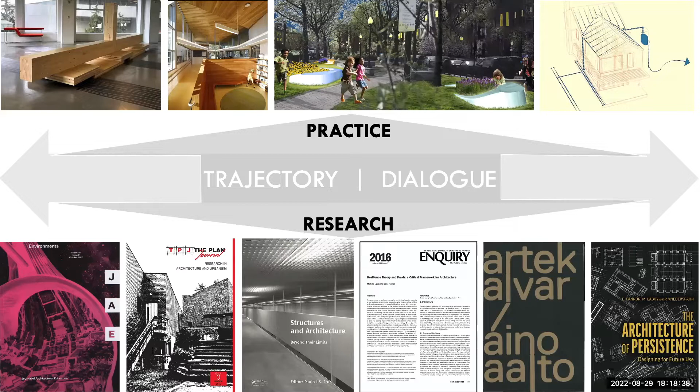So these motivations are what I call creative anxieties, which I have managed through a constant dialogue between practice and research. I have been very fortunate to have practiced for 17 years now, and that includes a substantial amount of built work, both new and renovated, as well as exhibitions, prototypes, landscape installations, and environmental strategies. So I'm a researcher who really is embedded in practice. I also have been teaching and researching for 10 years in a more official job where I conduct research. And I have been testing ideas and scholarship through articles, exhibit catalogs, books, all of which examine, reflect on, and challenge the way we think about practice.

And this dialogue between research and practice really started with my graduate thesis. At the University of Michigan, I combined a traditional historical research-based thesis for the urban planning degree that I was completing with a design-based thesis for my architecture degree. And that thesis was primarily focused on the concept of ecological fragmentation as a lens to analyze the landscape of Detroit. It really reflected my preoccupation with the condition that human development was creating in the landscape and its impacts on humans and other living species. And mind you, this was 21 years ago, and we still had time to fix the climate change issue. So we were still worried about how we're gonna fix this damage that we created.

I found that design, especially civil and landscape architecture, offered some infrastructural solutions to mitigate the effects of fragmentation. Ecological corridors come to mind. But in the human environment, we were a little bit less kind. Infrastructure dominates rather than just separating or healing. It operates at a scale that homogenizes people based on economic and political models that marginalize some by assuming that everyone has the same opportunity for mobility. And what results is not only ecological degradation from too much impervious surface and not enough green space, but also a misalignment between parts of the population and the richness of resources that we can have in metropolitan areas, in natural environments, etc. So basically a deep inequality. And that really had been an interest of mine since then.

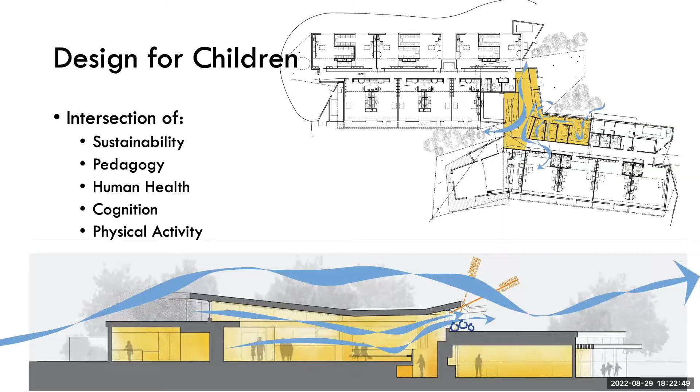This project at Princeton University was my last one at MTA. It was completed in 2017. And it became my own professional thesis, if I can call it that. It was a higher education client that had never built this type of typology before. It was intended to be for children of faculty and students there.

So it involved collaborating with many researchers in early child development, with educators, with parents, with user groups, and working very closely with Michael Van Valkenburgh landscape architects to integrate the building and the landscape into a continuous sequence of natural play, but also to advance the goals of the campus plan. Princeton had ongoing efforts to do ecological woodland restoration through each architectural project, and to build capacity of the campus in their green infrastructure for stormwater. So each project contributed to that.

The building and the landscape were not only beautifully connected as a spatial sequence for people, for water, for animals, but also they were an integrated whole. And it transformed a degraded greenfield site into a rich ecosystem for people and other species. But I couldn't help but wonder after those 11 years, how the lessons that were applied in these projects that were so well endowed could translate to environments and populations that have less resources.

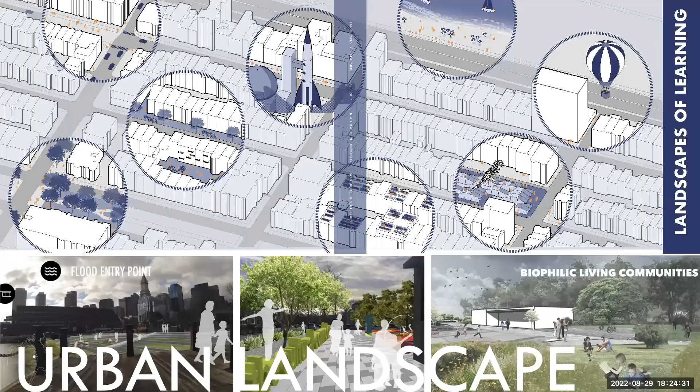And I went searching again for ways to interrogate how to mobilize that knowledge that exists within our profession of very thoughtful and talented professionals, and leverage that to solve bigger societal problems. And this is where getting into teaching as a research faculty gave me a new space to ask these questions. I became interested in how the paradigm of designing spaces for children so that they learn through exploration would be possible in urban environments, especially when so much of it was formed on natural play.

And when we think about the global situation, most populations are migrating to very urban areas that have less green space and more inequality. So after the Princeton project, I ran a 2-semester master research studio focused on this idea that in the city, the child explores the entire landscape, and therefore we should design every space in the city for learning and think about it as a constructed landscape.

The framework that emerged with our students really was an interesting exploration developed with a transdisciplinary team of experts, from neuroscientists to child's rights experts and pedagogy experts, to develop a set of principles to design cities that are more playful, safer, more green, more inclusive, and healthier.

The projects range from coastal protection that integrated active spaces for families, streets transformed into green cultural corridors that express the diversity of Boston children, to biophilic living communities that constructed new housing immersed in constructed landscapes. So this is really what propels my research, to work in transdisciplinary ways to generate knowledge about working with natural ecosystems and with real communities.

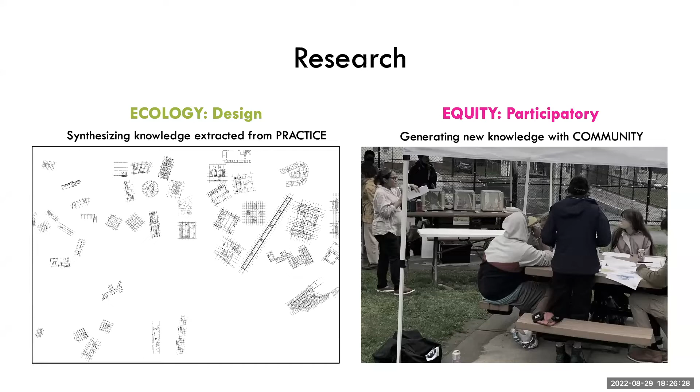I do systemic analysis of design practice through case studies, interviews, analytical drawings, mappings, and design projects. And I engage with communities most vulnerable to climate change through participatory research to co-develop new visions of how design can better serve them. And I'm working on the premise that our past and current approaches to building are completely inadequate. So we need a new paradigm.

In essence, we need a theory for building that is grounded in the real world and that guides us to build new urban ecologies that are more sustainable and more equitable, and to generate a robust discourse within our profession about where to build, what to build with, and who to build for.

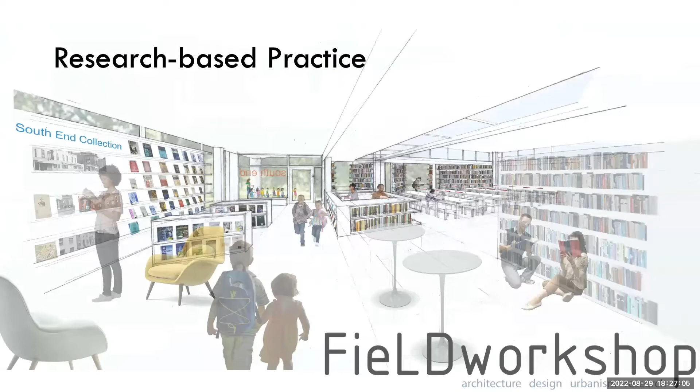This has also given me the benefit or the privilege of starting my own practice with my partner and husband, where we've been exploring some of the applications of this research to projects that have, let's say, lower budgets. We work with clients that have an interest in exploring interesting ideas and trying to do it in ways that are more efficient with resources.

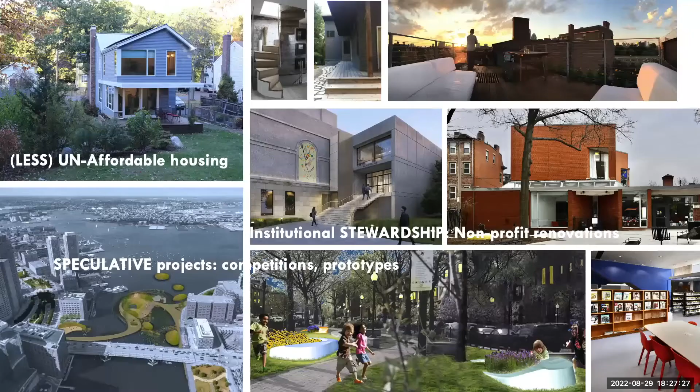So that includes what we call less unaffordable housing in Boston. I think affordable housing is really not a thing, unfortunately. We've done urban retrofits, and what has become a favorite of mine, transforming suburban typologies to be more sustainable and connected to the landscape, as well as what I call institutional stewardship.

So that's where we work with institutions like museums or nonprofit groups to do the hard work of master planning and executing the slow renovation of older but significant buildings, one little project at a time. And then speculative projects where we do competitions, prototypes, installations that explore some new idea about better connecting with the urban landscape.

So with that intro, I will dive into the meat of the lecture, which is divided into two related parts. In each of them, I will introduce to you what I see as a global dynamic that is changing in response to climate change. And then I will show you some of the design research and methods we're using to examine how architecture can have agency in mitigating and adapting to these new situations.

So I'll start with ecology, and I want to pause to say that the term ecological is thought of usually as anything that is inherently good, but I want to clarify that what I mean by that is really working with an understanding of relationships in complex systems. Ecology has also disruptive patterns to it.

So here's the big global dynamic that's changing. Obviously, we have a warming climate, and the mitigation of that problem is an ecological problem. We have to keep the global temperature rise below 1.5 degrees Celsius above pre-industrial levels, so 19th century, to avoid the most devastating consequences of climate change. It has already risen about a degree, and so we have about a half a degree left before things get really, really hard, and we have to mitigate really fast because we are running out of time.

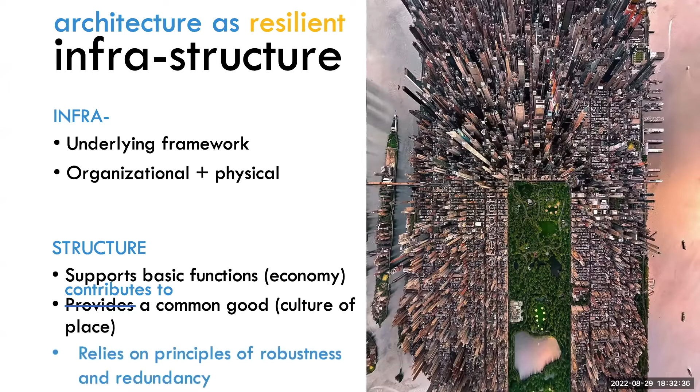Structure relies on principles of robustness and redundancy, and those are the very principles of resilience. And so as an infrastructure for adaptation, the structure of buildings really becomes critical in how we design for less carbon use over time. Now, this question was the motivation for our proposal for the 2017 Latrobe Prize, which the AIA College of Fellows had focused in 2017 on adaptive reuse and regenerative buildings.

My colleagues, David Fannon and Peter Wiederspahn, and I put together a proposal that we were fortunate to win, and it funded 2 years of research, and then we continued working for another year that ended in a book project called The Architecture of Persistence, and that was published last year. This theory is rooted in the idea that architects can create and support material ecologies and economies of persistence and long-lasting value that in itself challenges current material practices of waste.

In one of the chapters I wrote, a chapter called Material Ecologies, I argued for an approach that creates abundance and diversity as a means to longevity. And I mean this as a bit of a critique of sustainability, because we often focus so much on operational energy that we do the same thing we do when we design buildings too precisely for a program. That is, we focus on optimizing so much that we can cause the premature failure of that building before the end of life of its materials, simply because of obsolescence.

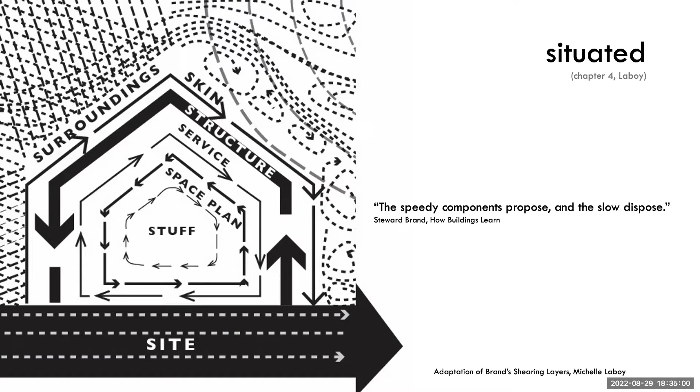Structural systems and structural patterns give form and connect to the land and shape the continuity of the public realm with the building, within the building. They are the infrastructure of buildings and therefore the infrastructure of cities. Now, this idea of structure we explored in an exhibition called Durable, which was shedding light on the role of durability as a measure of sustainability. And when we say sustainability, we're thinking cultural, physical, and environmental longevity. This exhibit tried to answer the question, what to build with.

It curated analytical drawings, models, and data on 4 case studies, each representing a primary structural material. We chose these buildings explicitly designed for a long life, although each in different ways, one in concrete, one in steel, one in timber, one in masonry. Each of them pushed the limits of their respective materials in some particular way. And most importantly, each of them was a very didactic building. They had a lot to teach us.

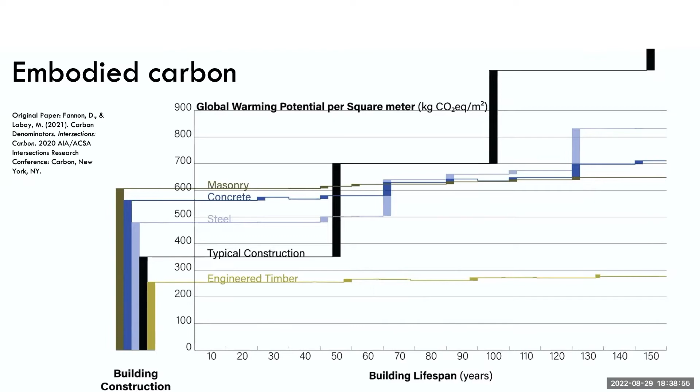Thinking about functionality and human experience as much as durability and energy use means that the building will serve many generations, and it amortizes that amount of initial carbon investment over a long time. If the building becomes obsolete, it doesn't matter what it's made of, it will be torn down. And so that's really important to think about. So if they are not that different in the long term, then how do we decide what to build with?

Well, one thing is, and this is something that emerged out of our research, we need to think about the affordances that are provided by the elements that have to stay there forever. Each of these buildings exemplify 4 concepts. I call them resist, capture, temper, and exchange.

You can learn more about these buildings in our writing, which describe how these materials were selected to create long-lasting connections to a specific place, to the local economy, to the renewable resources of the region, to the microclimate, to what one of these architects called the patrimony. It's an idea about heritage or an endowment, some ability afforded to the space by the earth. I kind of always thought maybe it should be matrimony, it's Mother Earth, but it's a different term.

So it does get into this very fundamental idea of integration, something that has more than one function, and in this case, some very fundamental functions integrated into these long-lasting components. But of course, because we are in a hurry, because of climate change, we have to mitigate quickly, we try to extract some lessons from that. Okay, maybe we should try to not build so many new buildings. That would be a good place to start.

And if you do have to build a new building, use low carbon materials, perhaps wood, if it can be sustainably and fairly harvested. But that's probably an overgeneralization. The larger point here is that persistence is place specific. It is connected to what Dolores Hayden called the power of place. The idea that landscapes are an important framework for public memory, for the preservation of cultural heritage, and because it represents a form of shared time and a shared territory.

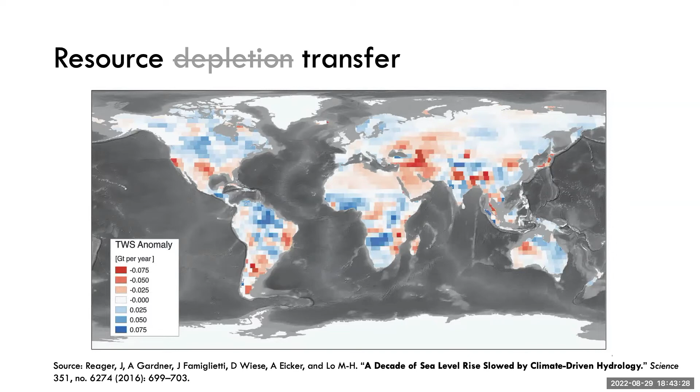And this is happening at the same time that sea levels are rising and aquifers are becoming contaminated and entire ecosystems are changing as a result. So the big takeaway is that climate change seems to exacerbate existing inequality, making the extremes worse. These differences in climate impacts are also exacerbated by differences in social vulnerabilities.

And these global shifts have very interesting architectural implications that are both technical as well as aesthetic. I examined those in one of my articles in the Journal of Architectural Education, as I found it perplexing that many contracts for architects end the responsibility of the architect 5 feet outside of the building. From that point on, it's civil or landscape that deals with it. Our job is to shed water away from the building. But we won't get away with just shedding water for much longer. We will need to be increasingly creative to work with water within architecture projects.

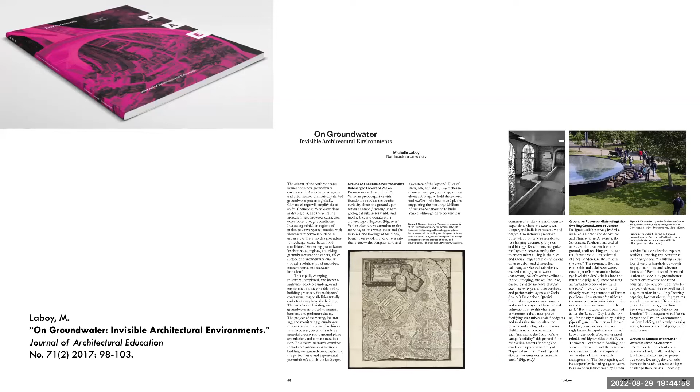So I wrote about how in places like Venice it is not only necessary to adapt the idea of ground, as Carlo Scarpa did so beautifully in the Fondazione Querini Stampalia, maybe in the 60s or 70s, to manage the recurrent influx of water in what is known as the acqua alta, the big increases in the surface water. But the existence of most of Venice is tied to what happens below grade, because Venice underground is also a forest of millions of wood piles supporting buildings that have become an entire ecosystem.

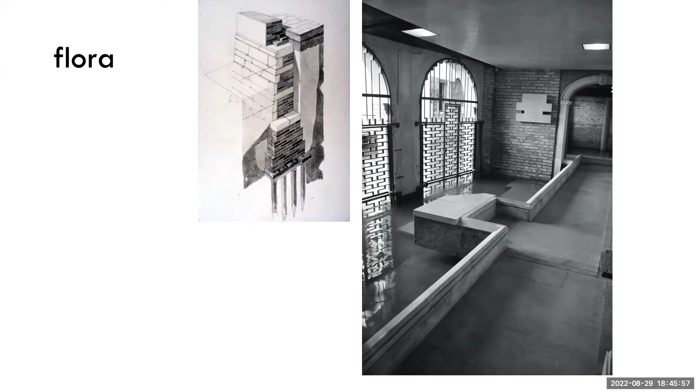And scientists are monitoring the changes in the flora of microorganisms living in that wood for signs of changes in the lagoon caused by sea level rise. Some of those changes could result in the kind of ecosystem that eats at those piles and could actually be what destroys Venice, as opposed to the rising water.

In Rotterdam, sea level rise is not the biggest concern for the Dutch, who have mastered this relationship for centuries. It's what they call cloudbursts, when storms drop way too much rain in a small amount of time, and there is not enough time for the storm drain system to absorb that, and it floods. The city estimated that based on the projections for rain in the future, they need the capacity of at least 160 million gallons of water storage, or essentially building a 200-acre lake underground.

And for representational purposes, I made a 200-acre lake as a circle in the aerial photograph of Rotterdam. But most of that, as you see, is buildings and impervious surface. So not exactly conducive to storing groundwater.

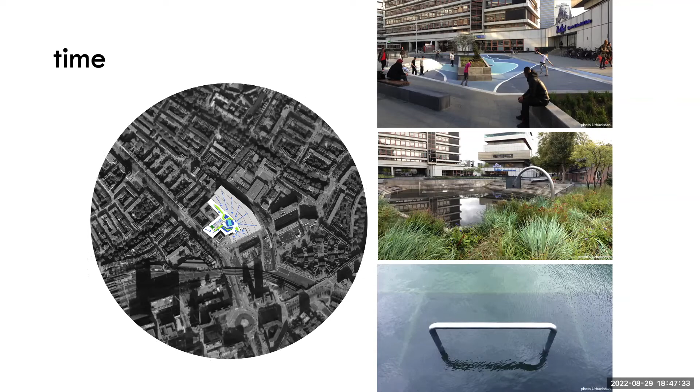Now, the firm De Urbanisten came up with the concept of the water square, a floodable recreational space in the center of blocks that floods spectacularly through channels and waterfalls when the underground storage overflows. And it gives the water time, I think a maximum of 72 hours, to sit there while it infiltrates below grade or evaporates or feeds plants, and then leaves the rest for the storm drain to handle later when the load has gone down. This very architectural solution, which they call buffering rains, is now the central concept for Rotterdam's climate adaptation plan.

But the idea of infiltrating water into the ground does not work everywhere, as we can see in London, which has a fascinating groundwater history. A shallow and a very deep aquifer, as seen in the section I drew here, it's a section of the Serpentine Pavilion by Herzog and de Meuron and Ai Weiwei.

In that section, they excavated the building down to the depth of the shallow aquifer and built the roof, which now is at eye level for people, as a reflecting pool of rainwater that came down into the water hole in the center of the architectural space to recharge the aquifer. And that is a really beautiful way of thinking about, telling the story of holding and buffering water.

The issue, though, is that the project does not express that for hundreds of years, Londoners drew down the deep aquifers by pumping groundwater by hundreds of feet. And as you can see in the timeline in this section, when they moved to piped water supply and abandoned those wells, the groundwater has been coming back up with a vengeance.

And because the city has built basements down below the shallow aquifer, so deep and extensively, there is nowhere for water to go into the ground on the shallow aquifer except under roads. Now, with increasing rain projections and sea level rise, the groundwater is threatening the city from underneath by swelling the London clay. So London is continuously pumping groundwater at the pace of 70 million liters per day, just to keep things stable. And this can only get worse.

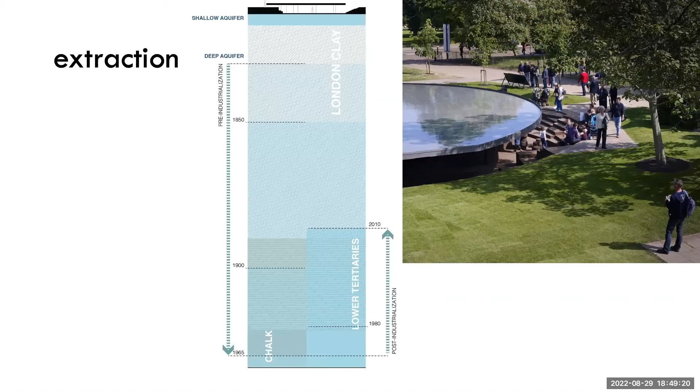In contrast, the city of Boston exists between two threats: excess surface water from storm surge and dropping groundwater levels from not having enough infiltration due to impervious surface. And not just that, drawdown from leaky pipes and leaky basements, etc. And this is actually threatening the historic fabric of buildings that, like Venice, are built on wood piles that are deteriorating when exposed to the air underground, because they're supposed to remain submerged in order to not rot, basically.

And these historic areas are built in fill on low-lying areas. So you can see the old Boston original land, and the gray is the fill. All of that fill is essentially wood piles that are potentially deteriorating. Now the city has over 900 monitoring wells across a very small district, and they measure the groundwater about quarterly, as fast as they can, because they have one person doing this manually all day long.

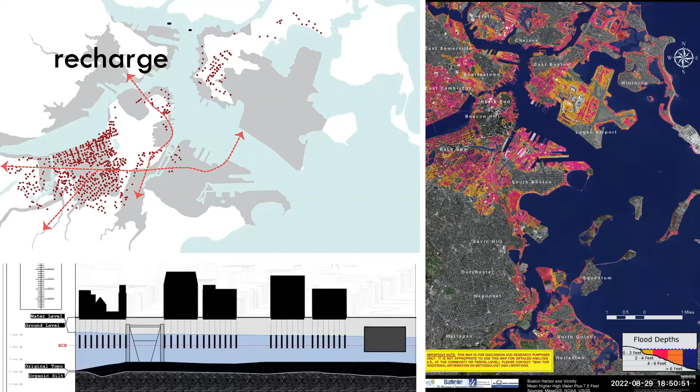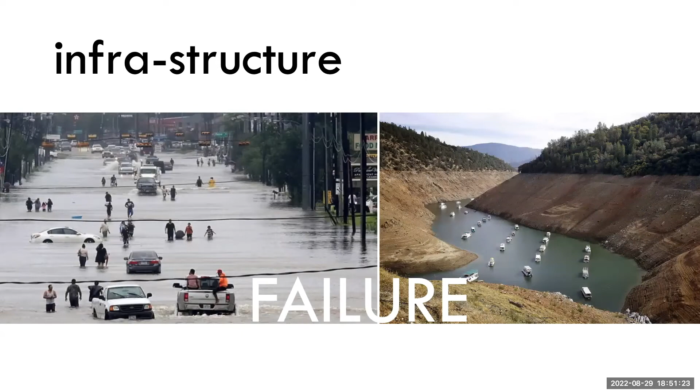So these projects show that the effects of climate change are not uniform and indeed are very context specific, and that most of the time they're not very visible. Unlike the very dramatic and more obvious failure of infrastructure, this happens because most infrastructure is centralized and hierarchical. There is no redundancy. One central part fails, everything connected to it fails. That is the result of systems designed with the belief that we could outsmart nature and overconfidence in our ability to do big things with technology, like stopping the ocean.

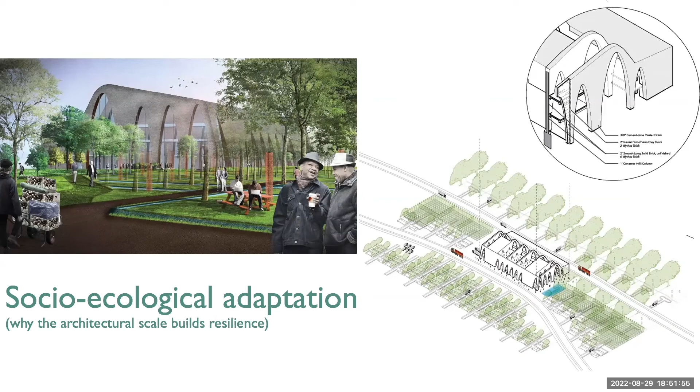Now, recently, green infrastructure has emerged as a solution that works with natural systems. Not recently, but it's becoming more talked about. It's leveraging the capacity of natural systems, creating more redundancy in each site, whether by generating your own electricity or managing stormwater within each site, et cetera. It lends itself to incremental changes that match more closely the architectural scale, which means that they can better integrate into and enhance the local context of social and ecological systems at a human scale.

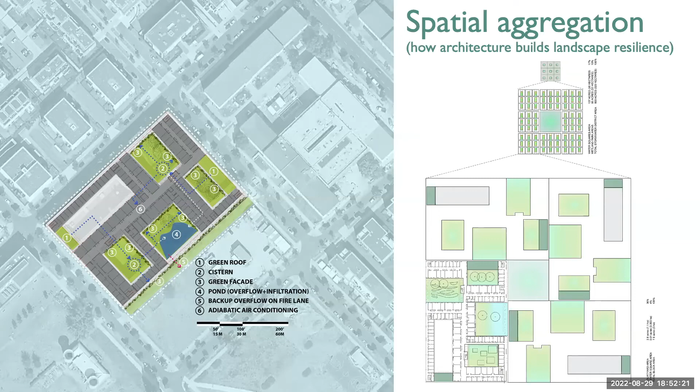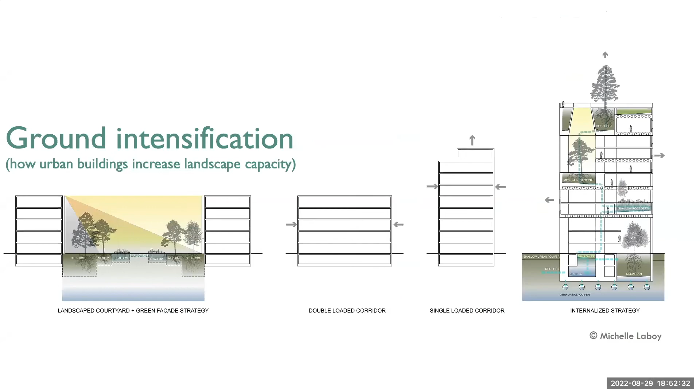In urban environments, this paradigm is not one of self-reliance, but one of cooperation. It's not the building as an island, but one that contributes to a more resilient landscape, because it creates a more distributed network of green nodes, more redundancy than a big centralized solution, and these hyper-productive living systems can grow to become a network. And there's an opportunity for continuing innovation in vertical intensification of ground surfaces within the architectural volume to increase the inherently limited capacity of the urban landscape. Now, there are many ambitious projects that are doing this really well.

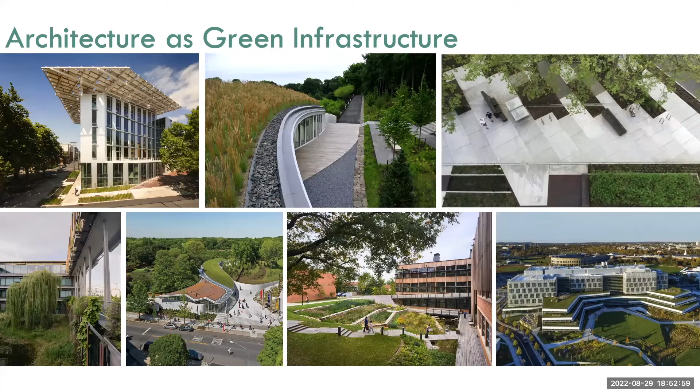Building and green infrastructure, very well integrated to do both mitigation and adaptation. They rely on living systems, which are renewable, resilient, and provide many co-benefits for people in those buildings and around the buildings. But these are exceptional projects. And if we are serious about equity, we need to do more of this in the places that matter most, and we need to measure impacts beyond site boundaries.

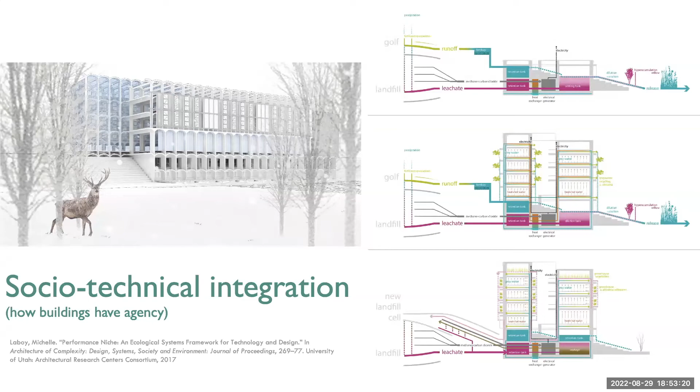But to do this, we as architects need to better understand the ecological and social context in which we're building. And we need to embrace science and technology to measure and to engage the most affected communities in visualizing these impacts and envisioning an alternative future. This is integrating the social, the technical, and the ecological. I was interested in knowing if this would work, and I found an opportunity to experiment in Boston.

Since 2007, the city of Boston used the zoning ordinance to require that architectural projects of more than 50 square feet have to install groundwater recharge stations. That's what you see on the left here. It's basically a big concrete thing filled with rocks that holds stormwater for a little bit, and then it gives it time to infiltrate. It needs to store and infiltrate the first 1 inch of water that falls on a site, which is actually quite a bit.

So I got very interested in mapping these, because through those first 10 years, and now maybe 15, close to 400 recharge stations have been installed, primarily in backyards. The most common size of a brownstone in these areas is 200 cubic feet of water storage, which, according to a model developed by engineers at Tufts University, each of these can increase the groundwater by as much as a foot in areas immediately adjacent to a recharge structure. So I saw great potential to understand the cumulative effect of a network of small interventions within the context of architecture projects.

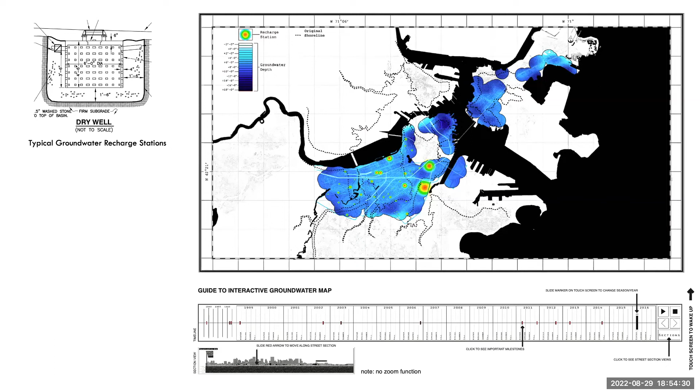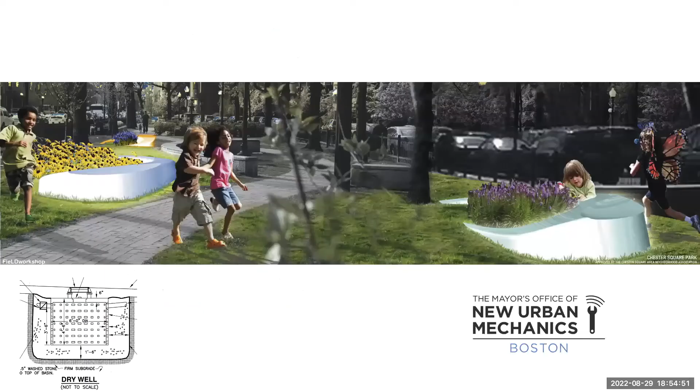But what also intrigued me about the dynamics of stormwater is how little legibility it has until it overwhelms. These are all over Boston: Don't dump, drains to the Charles River. That's the closest you get to understanding, oh, what I put in here is actually going to go down to a larger ecosystem. So I did 2 things. I developed ways to make those recharge stations more visible in public space by designing an object of urban furniture that marks the location of the underground dry wells and integrates groundwater sensors and lights that communicate real-time information about an otherwise invisible process.

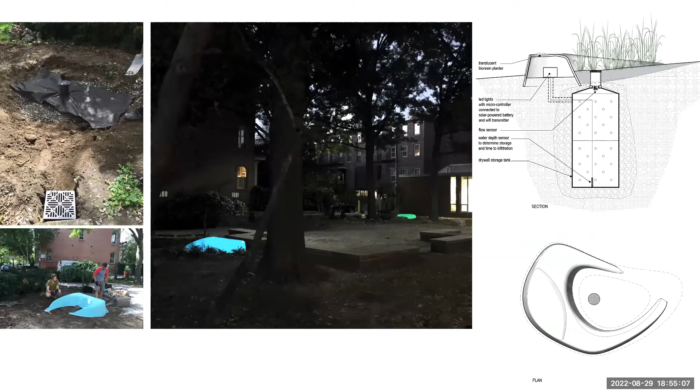And the second, I transformed the monitoring wells, which exist in the sidewalks, into interactive and luminous objects on the sidewalk, using sensors and Bluetooth to engage the public with real-time information about ecological systems. And that would show up in an app that we designed for crowdsourcing the data, where citizen scientists could be engaged in the process of collecting and uploading that data, much longer than the one guy doing it manually around the city. So we worked with the Boston Groundwater Trust, and we proved this concept. We had it installed for a few months.

It was really great. Now, the good thing about experimenting this way, it didn't change the world, but eventually other people with very cool and related ideas reach out to you and say, hey, do you want to work together on something? And that's how we came to form that team that responded to the call for proposals for the 2021 Latrobe Prize. The theme was the intersection of two problems: the scale of our planetary health problems being enormous, but the solutions having to be built locally to create more equitable outcomes, and that we should try to understand how architecture and design can contribute to outcomes that go beyond the individual users of the building, understood as a more interconnected paradigm of cooperation and generosity.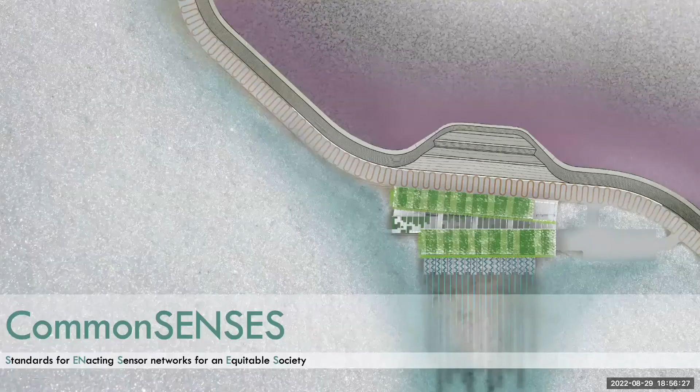The proposal was called CommonSENSES. It's a play on sensor networks and the idea of the commons. We have 4 faculty team members from different fields: architecture, Dan O'Brien from urban informatics, Amy Mueller, an engineer that designs environmental sensors, and Moira Zellner, who's an expert in participatory modeling and is developing tools for that. And our most important partner in the research is the city of Chelsea. We're working with this community that exemplifies how buildings are at the intersection of planetary and human health.

Chelsea's landscape, which is just outside of Boston, embodies the state of our planetary health. It's burdened by transportation and industrial pollution. It is the part of the Boston Harbor where ships bring jet fuel to be stored for the nearby airport. It's also an embodiment of the pressing problems of human health in cities.

It is dense, overcrowded, very expensive housing for many immigrant families, and it became the epicenter of COVID-19 infections in Massachusetts and related food insecurity that added to ongoing epidemics of asthma, diabetes, heart disease in these communities. And this, of course, results from decades of discriminatory planning and development policies.

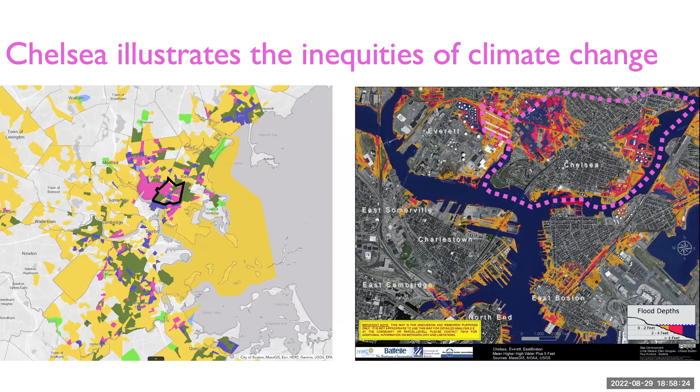Now, these very local dynamics are not unique to Chelsea. In fact, they tell the story of climate change globally. That is the story of urban migrant communities, which, as I mentioned in the UN report I showed you before, are going to feel the disproportionate impact of climate change.

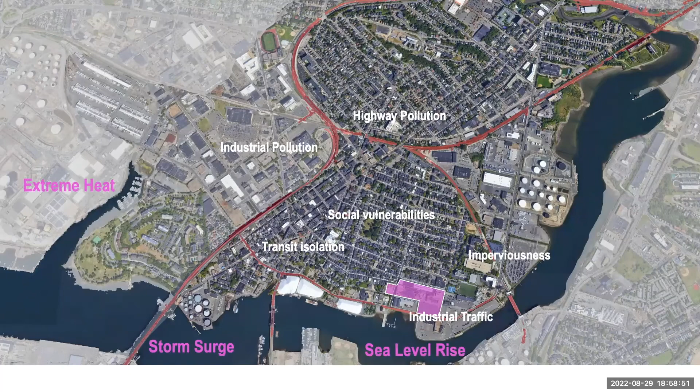And indeed, Chelsea is choked by transportation-related sources of pollution converging around this marine industrial port. Interstate highways, industrial arteries, the airport are all right there. And this is compounded by an overbuilt environment with high imperviousness and little open space, which exacerbates the risks from climate change, which in this area are sea level rise, storm surge, and extreme heat.

And when you look even closer in Chelsea, you see a microspatial inequity problem, that from one block to another, from one street to another, the environmental quality differs greatly, placing disproportionate burdens on smaller numbers of people that did not create the problem to begin with.

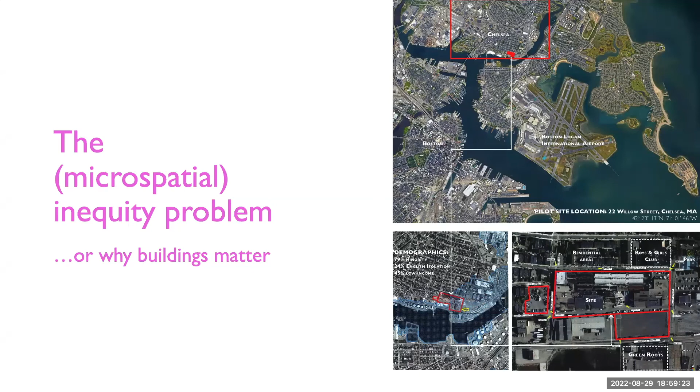And so we started looking at the development project that is about to transform this industrial site in the waterfront, not by displacing industry, but by building a better relationship between industry and its residential neighborhoods. They have great plans for green infrastructure, green buffers, etc. And so we are going to be measuring the impacts of that work with sensor networks before and after.

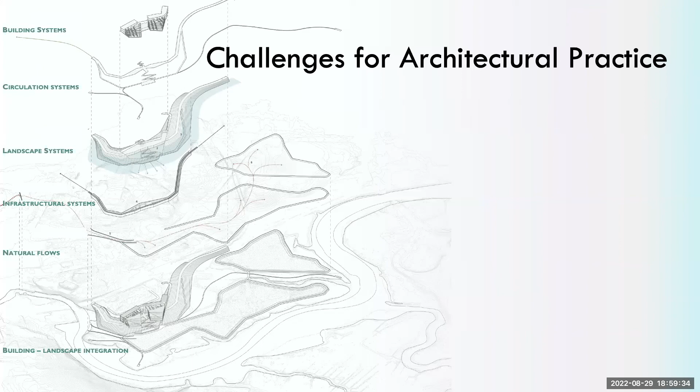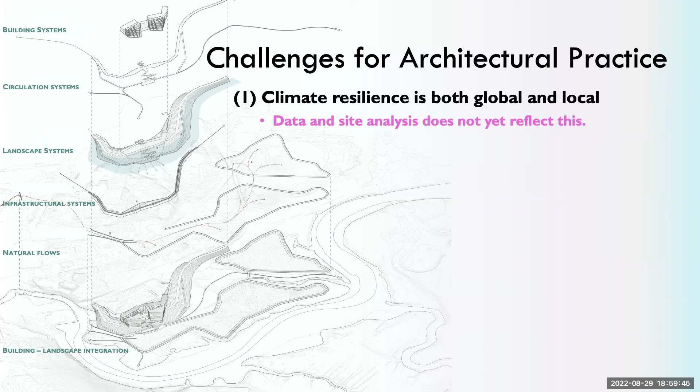What we're trying to solve is a challenge for architectural practice, that climate resilience is both global and local, but the data and the site analysis do not yet reflect this. Buildings shape those microspatial inequities, but we don't have the methods to measure and mitigate the impacts.

The design process needs to be conscious of these inequities, but the sensors that could be a good solution for measuring and understanding that are underutilized in design. And dynamic data is very powerful, but it's only powerful if it's interpreted to guide better community decisions.

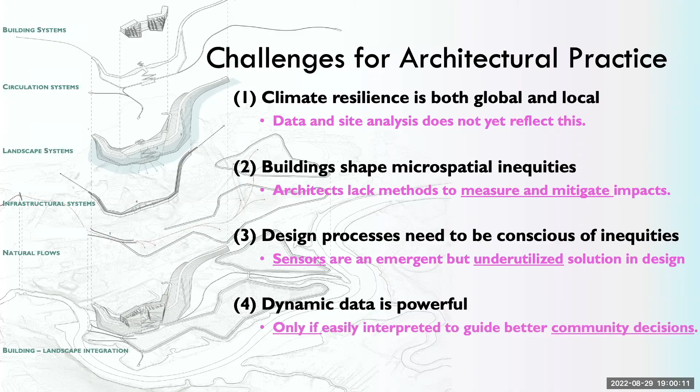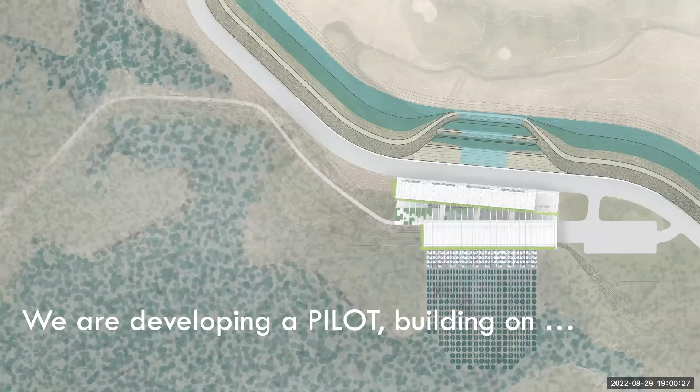So we're building a pilot. It's a demonstration, and it's to prove that it's a good process so that every municipality mandates this equity-driven process as part of the environmental assessment and community engagement of development projects. It's building on the renewed urgency caused by the pandemic in this part of the city, and it's building on a particular part of the city that's seeing dramatic transformation.

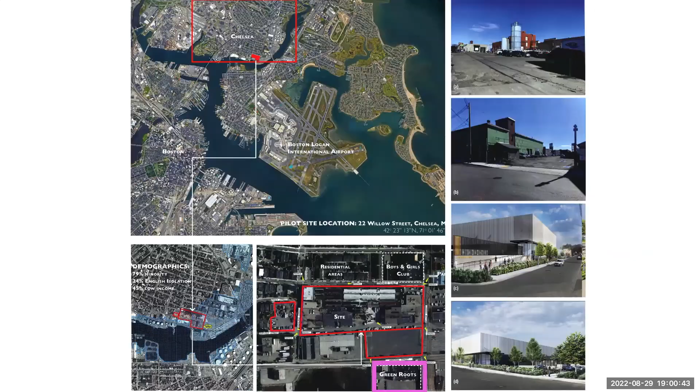We're also building on the activism of this community. We're working with a community organization. We're building a relationship with them to understand what their priorities are, what they care about, what they're fighting for, and how visualizing environmental data can help them be better advocates and co-designers in this process.

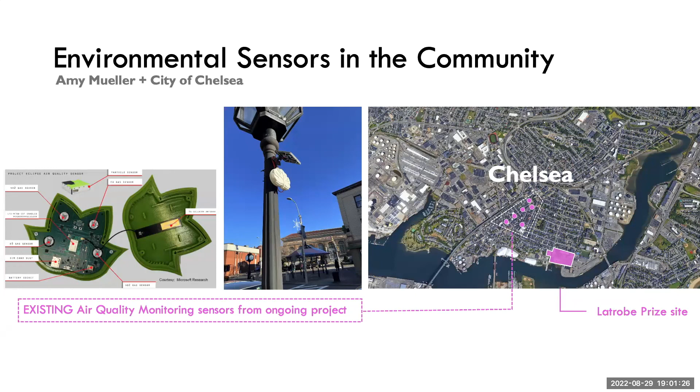Now, Chelsea is being very proactive at understanding the interaction between infrastructure decisions and consequences. They started a project putting in air quality sensors, and this project that we're starting now will use air quality sensors in addition to flooding sensors and temperature to measure different types of hazards.

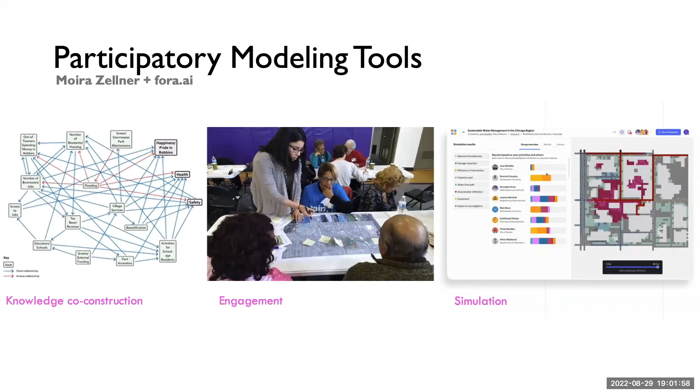We're building on the urban research policy infrastructure to make that data available for the community so that they can understand the information and make sense of it with us. And we're using participatory modeling tools, forms of knowledge co-construction and engagement to help people make decisions and participate in the design process with us to understand how to invest in green infrastructure, where to do it, what types, and with what purpose.

Now, the goal is to develop a transformative model of practice in which architects are envisioned as co-learners and co-designers with the community. So using sensor networks to identify the microspatial inequities, understanding how green infrastructure mitigates those microspatial inequities by actually measuring real projects, and using participatory modeling to make sense of that data and empower the community to invest in its own transformation.

And the goal is that together, these things will create a science and community-driven process for more equitable development. I'll leave it at that.